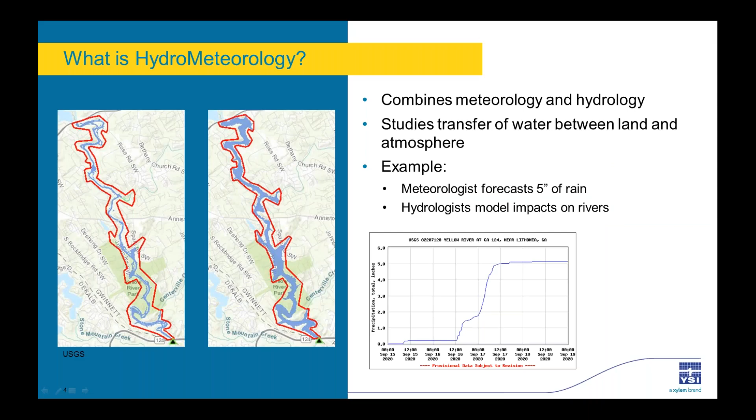All right, so we will pop into our first sensor then. Like Michael talked about with the agenda, we're going to talk about 4 sensors today. So the first one that we're going to talk about is the submersible pressure transducer.

So one extremely nice advantage to this pressure transducer over other models of submersible transducers is the ability to provide that on-site barometric compensation. What this means for you is that the data is highly accurate upon collection and no additional corrections need to be applied for that compensation. So it also has a stainless steel design, which is going to resist corrosion.

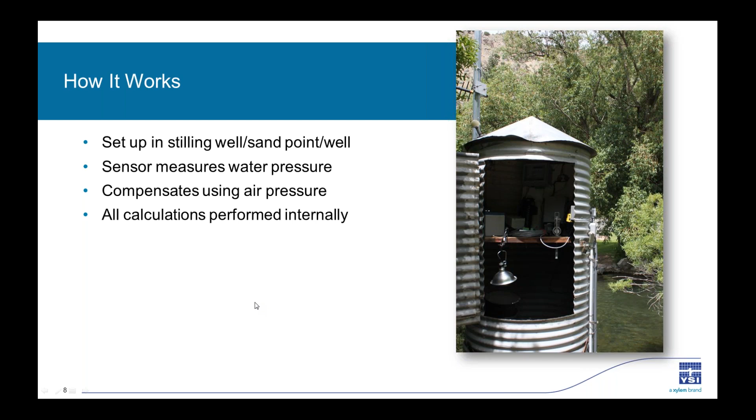So now in this image here, we can actually see a stilling well deployment in Europe. So this station is able to accurately measure the level of water moving through the area from storm flow and also due to pumping into surrounding fields. So that's just a brief overview of our submersible pressure transducers.

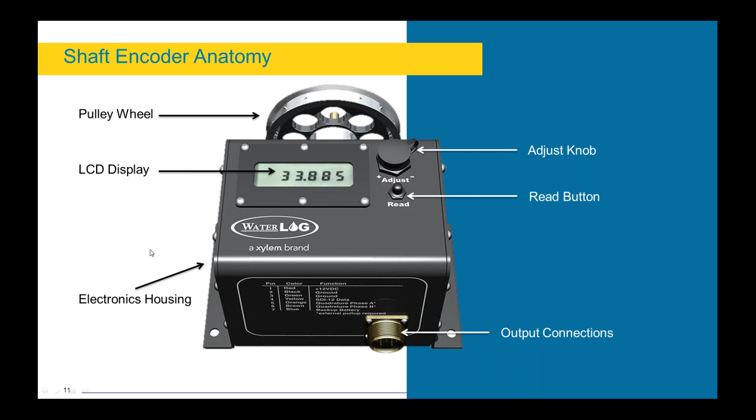So one huge advantage of the shaft encoder is that this one in particular is an optical encoder, which means that the encoder measures absolute position rather than change in position. So we're going to cover this a little bit more in the next slide when we talk about how the sensor works. Also, because of this technology, if power is lost to the sensor, the position itself is not lost. So no visits to the gauge are necessarily needed for a small power blip in order to reset the sensor, which is really cool.

So there's also several requests that come in every year about using other pulleys or tapes with the sensor, and that is also definitely possible. So I wanted to throw that out now.

And finally, similarly to the submersible pressure transducer, the ideal deployment for this sensor is in that same type of stilling well. It is not ideal for turbulent environments, and changes in water level that are too fast for any model of the sensor can actually cause that tape to slip off of the pulley. So just be really careful and aware of your deployment conditions.

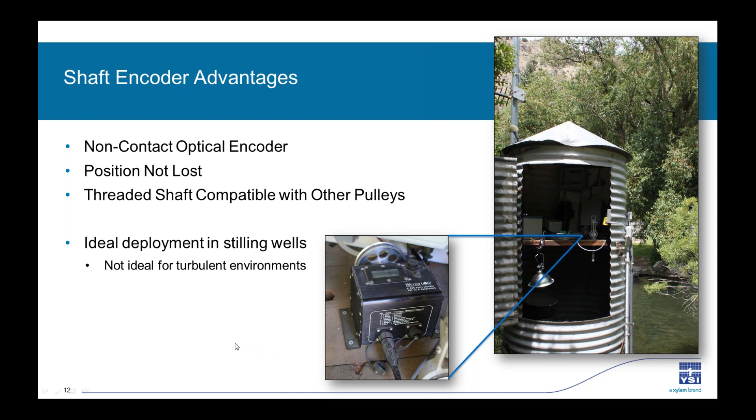So how this sensor works. So after you have the sensor set up in the stilling well, what's actually happening? So as the float rises, as you can kind of see in the picture here, the pulley is going to turn. So there are two non-contact encoders that determine the shaft angle, and there's a magnetic turns counter that counts the number of revolutions that the pulley makes.

Internally, there's actually an LED that flashes through a circular barcode onto a sensor array, and then the image is decoded into a unique position. So the turn counter monitors complete revolutions of that shaft. So by combining the measurements from that turn counter and from the optical encoders, from all of these sensors, really, an accurate absolute measurement can be calculated.

So here's an example of how the shaft encoder can be used. This is in Del Rio, Texas, where water rights are a really big issue. Water rights are permissions for landowners that give them the ability to pull water from a stream or a river. And these landowners are really limited on the amount that they can pull annually. For example, if a farmer uses too much water when compared to his allotted amount, he's going to receive a fine and have to pay some money for using too much water.

So therefore, it's extremely important that a precise measurement is used, and measuring the flow at a certain gate opening amount just doesn't always cut it. Water level at these sites out in Texas is correlated to a discharge rating, and those discharge measurements are made frequently, as can be seen in the image here on the bottom left.

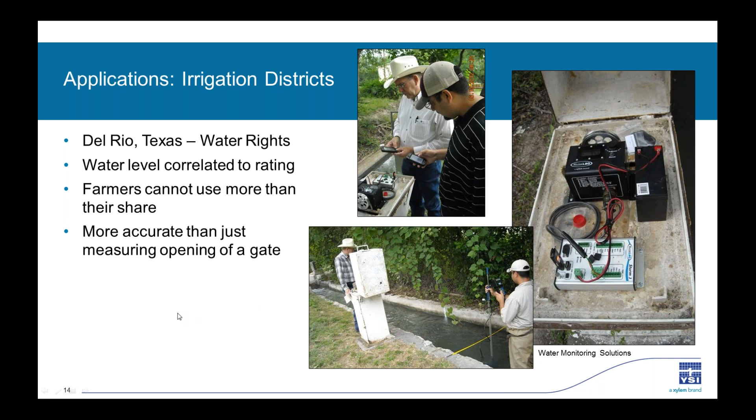Our next application is from Alameda County, California. They used to use these really old, large shaft encoders and these kind of ancient data loggers as well. The maintenance on this equipment was pretty extensive, and when monitoring for purposes like water rights, habitat sustainability and flood management, it's really important to have easy to use equipment that provides good data quickly. When it comes to flood monitoring, as sites lose communication, we can literally have lives in danger. Lots of lives are lost every year to floods and water.

So this group actually replaced their old equipment with new equipment that's easier to maintain, and they're pretty happy to say that they now have better data than before, which has been proven to be useful in all of their applications listed here.

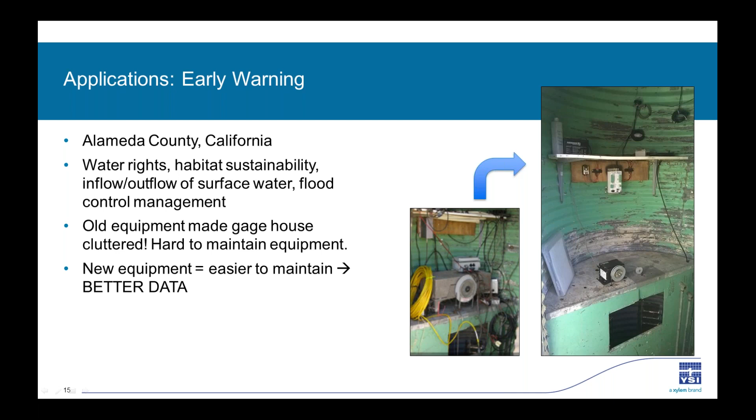The next sensor that we're going to go over is the Amazon bubbler. With this sensor, we're now back to talking about pressure transducers, but I want to point out that this one is actually a non-submersible pressure transducer. So let's dive in a little bit and see what the differences are between this sensor and the sensor from the first section.

The Amazon, like I said, is a non-submersible pressure transducer, and we say that because the portions of the instrument that perform the actual computations remain outside of the water the entire time in this fancy little box that is the Amazon. We'll talk about how the bubbler is set up in a bit, but it was designed to be extremely user-friendly and has an easy-to-read screen, quick touch buttons and streamlined navigation, all the fancy bells and whistles that we all like to see and use every day.

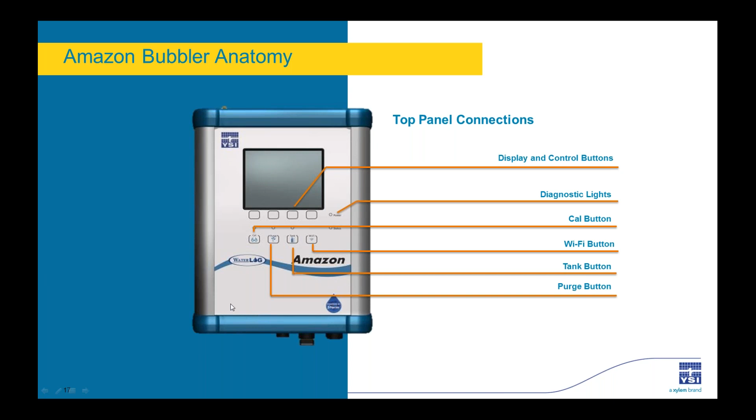On the bottom of the Amazon is where all the connections are. There's a couple of USB ports for transfer of data and also for a Wi-Fi adapter connection. There's also a place for the transfer of air into and out of the system on the left-hand side. And of course, we offer a few connection options such as RS-485, 4 to 20 milliamp signals, and SDI-12, so you can communicate to a data logger over a variety of signals.

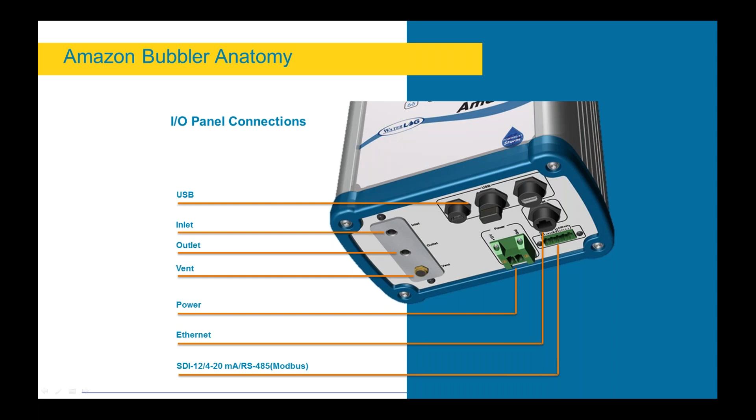The key advantage to using the Amazon bubbler over sensors of the same type is the ability to connect with many different systems, because it communicates in so many different ways, as I just mentioned, with the 4 to 20, the RS-485, and SDI-12. The Amazon also has a special ability to store data internally, so it can even be deployed without being connected to a data logger, which makes it a standalone system, which is really nice for those deployments where you just need to get something out there real quick to look at the data later.

So similarly to our other instruments, it's extremely accurate, and unlike some other bubblers, it doesn't require an external pressure sensor because it has one built in. So finally, it has two easy ways that it can be programmed. One is via the browser interface, or the other is the optional low power display that you can kind of see in the picture here.

So the sensor is really great to use in streams and rivers and lakes, and an orifice line can be mounted along a stream bank or down a culvert wall as a couple of different examples. So the averaging time of this sensor can also be adjusted, which is going to account for any effects of waves or turbulence to provide you with the most accurate water level reading possible. So the difference between this one and the submersible pressure transducer is also that we don't have to have still water for the Amazon bubbler.

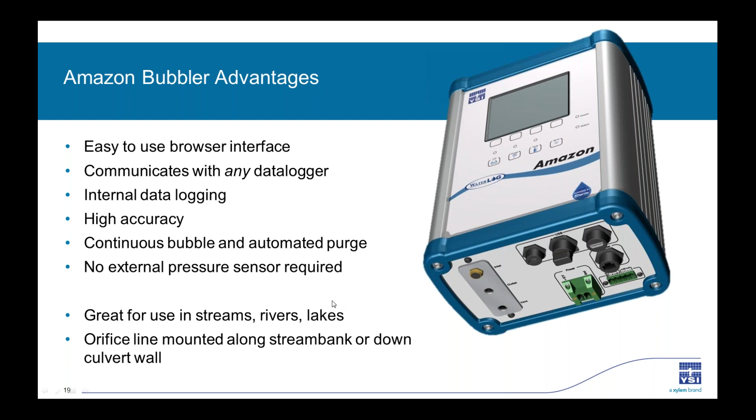So now a little bit about how a bubbler actually works. So this black and white image here on the top left actually shows an older model of the bubbler that our company used to carry, which is called the H3551. But the image is still really going to help describe the internal components and how the sensor works. So inside the bubbler is a compressor, and there's also an air holding tank. So the two of these working in conjunction are going to provide a continuous flow of gas bubbles through the orifice line that runs from the Amazon down to the water, as shown in the image on the right.

So the amount of pressure that it takes to create this continuous flow of bubbles actually determines the depth of the water. So as you can see here on the slide, the equation used to compute this in essence is height equals pressure divided by specific gravity of the solution. Now, the Amazon also has an integrated pressure sensor to account for changes in external air pressure as well to always provide the highest accuracy data. So that's going to be accounted for in that equation too. So it's not quite as simple.

So finally, the orifice line and the tanks need to remain really dry in order to work properly. So connected to that air inlet needs to be a desiccant canister as seen in the bottom image here. So the desiccant dries out the air that comes into the instrument and does need to be changed periodically, and typically you can tell when it needs to be changed by a color change in the desiccant itself.

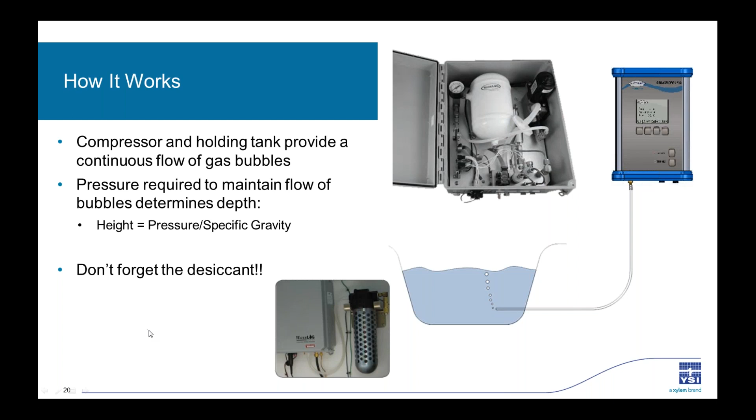So now we have a couple applications regarding the Amazon, and the first one, we're back in California again. So now we are in Contra Costa County, California, which is near San Francisco. So the county employs several of our Amazon bubblers as a part of their flood monitoring network. They actually have a really large rainfall network that's used to monitor where rain has fallen, and the water level sensors are going to allow employees to monitor the flow and determine when and where the public might actually be in danger.

So the creeks that they measure are typically fairly dry, so it's really important that they have a water level sensor that can handle rapid changes in water level, which the Amazon can do really well. So the team also highlighted that the Amazon is really easy to configure, and even though they do have that optional keypad, they actually prefer to use the easy to use GUI, the graphic user interface.

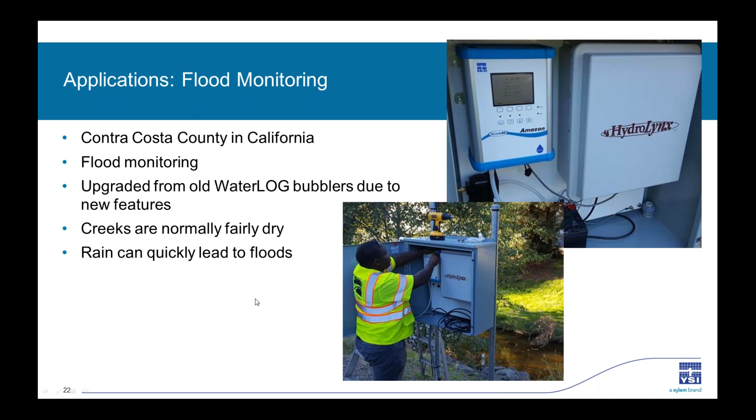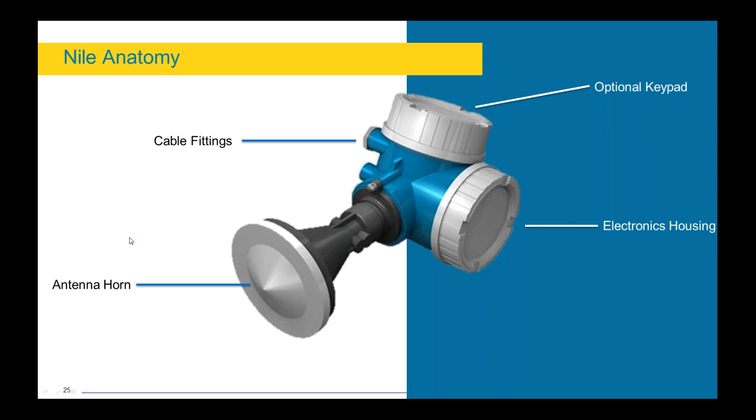Now, what you're going to need to do with the Nile is actually have an overhead structure similar to a bridge, or maybe you're able to build some kind of infrastructure piece to mount the Nile radar. But what you want is a piece of infrastructure that's not going to move around too much because, of course, any movement is going to affect your sensor readings. So, for example, if you have a really windy area, you don't want to just have it sitting on a fence post sticking over the creek. You want to have something really solid.

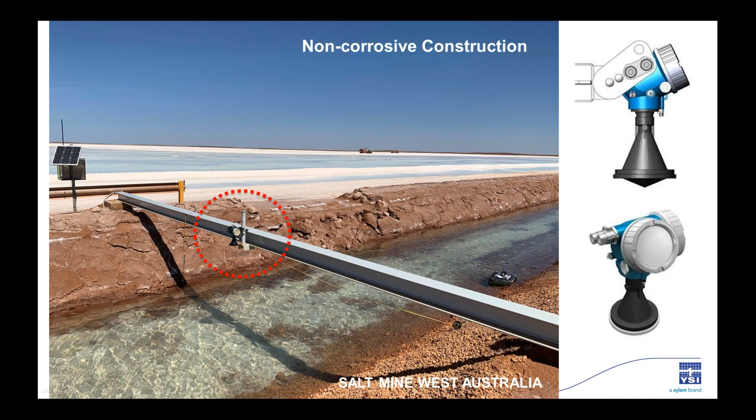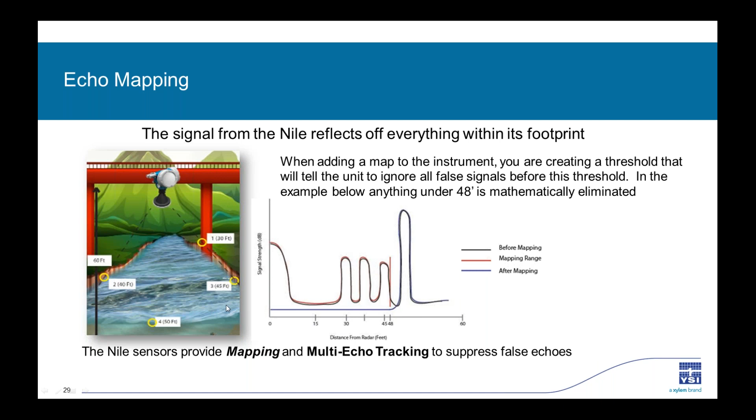So there's definitely a lot of uses for all of these instruments, but I have a lot of application examples for the Nile radar here. So the first that I'm going to talk about is just that simple water level measurement. So here in the US in Chicago, they wanted to augment their water quality monitoring station with the addition of a water level sensor. So water quality changes can actually be better explained if there is accompanying water level data.

So they installed a radar because it was non-contact, it was really easy to set up, and it required minimal maintenance. So now they have real-time dissolved oxygen and water level information to better determine what's going on at the site.

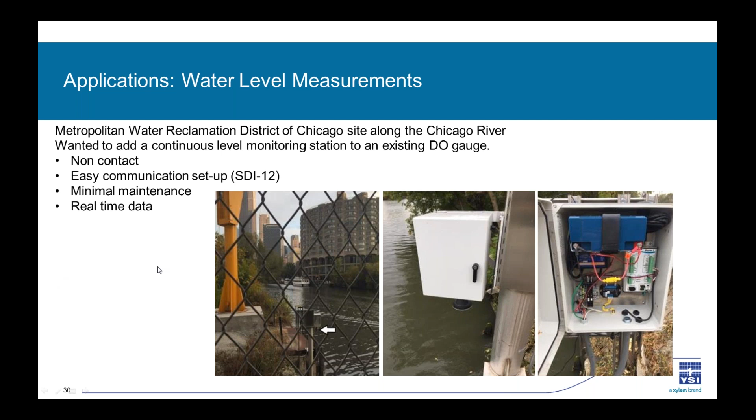So air gap measurements are very important for those in the marine transportation industry. So it's vital that ships know if they have the clearance to safely pass underneath a bridge. And one of the measurements that can be transmitted by the radar is that distance to water. So the Nile will actually give you two different measurements. One is air gap and one is water level, which can be related to depth, of course, through surveys.

And by combining these two, safe passage can basically be guaranteed for these ships. If they don't have the depth, and if they don't have the air gap, they can't travel through this area and they have to wait.

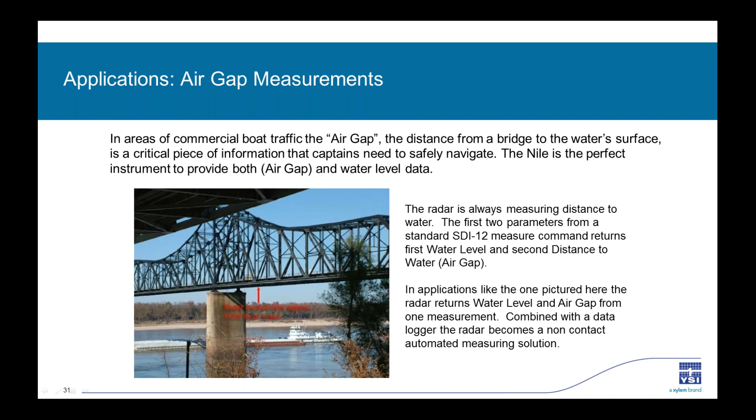So the Nile is also really important for monitoring tides to verify how high and how low the different tides are, which again can be really helpful for marine safety. So the tidal data can also be used to determine trends to see if water levels are changing over the years and what the effects of tidal change are on the ecosystem. So in this case, the Nile is using one of the NOAA modes, which collects a large amount of data and performs internal statistical analyses, which then lead to an accurate average data point.

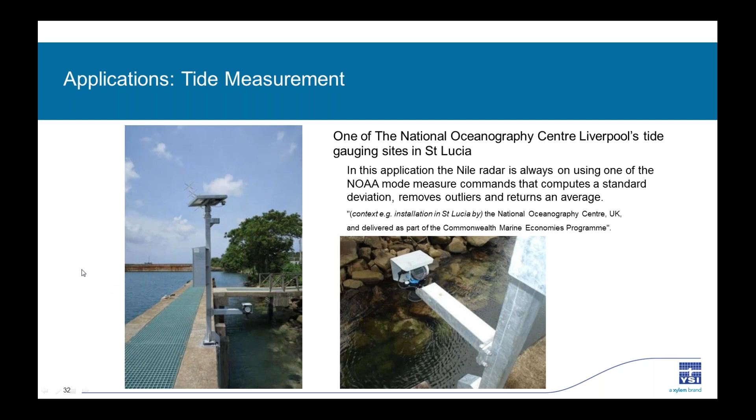The data is eventually sifted through and the mean and standard deviations for the 181 seconds are calculated. The radar can then output the mean water level, the number of outliers, the number of good values used in the calculation, and also that standard deviation.

So I do have a little video here that I'm just going to try and take 2 seconds to play that just kind of shows you how easy it is to remove the Nile for maintenance, and it's just as easy to put back in. So let's see if it'll play. See, they just quickly took it out. Now they can do the maintenance really quick and life is good and they can put it back. So with some SDI-12 commands after they reinstalled that sensor from a data logger, the Nile is going to begin to record accurate data again just really soon after that install.

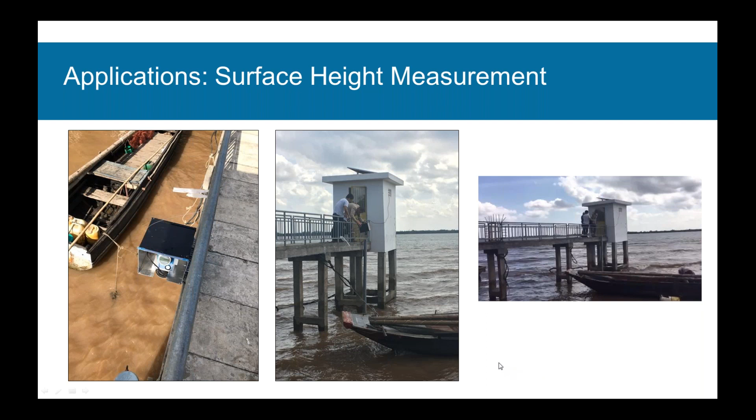So finally, the Nile can be used to monitor storm surge during hurricanes. Since these radars can be mounted above the highest level of storm surge heights on existing infrastructure, there's actually no worry that the units are going to be flooded, and accurate data can be collected before, during, and after hurricane events. So through the collection of this data, emergency management can plan best where they will need to deploy to save lives and property. And there can, of course, also be a lot of studies done too to see what the effects on the ecosystem are.

And Michael, I think we are ready for another slide. I think they've had enough of me talking for just a minute and would like some engagement. Thanks, Kerry. Certainly educational and very informative.

Thank you. Our second poll question is, please indicate which water level sensing technology you predominantly use. Submersible, shaft encoder, bubbler system, radar water level sensor, or other. Again, for those of you who have come on late and are not sure how to use the poll question, simply move your mouse over one of the answers and simply click with your mouse on the answer you'd like to respond with. So just give our audience a few seconds to respond.

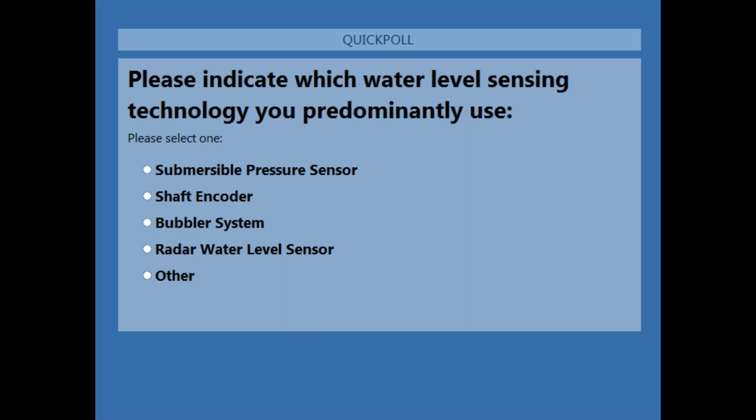All right, Kerry, it looks like we've got most of our responses. Let me just share those with the audience and yourself. It looks like 50% of the audience have answered submersible pressure sensor. Interesting. That's really some good information. What is our next most popular there, Michael? Yeah, it's actually 24% with other. Oh, interesting. I'd be curious to hear what those other types of sensors are. So maybe you guys can pop that information into the questions panel that Michael was just talking about. That'd be fantastic to learn about. This is followed by radar water level sensor at 18%, and then 5 and 3% for bubbler and shaft encoder. So it looks like submersible pressure sensor is the level sensor that's predominantly used by our audience.

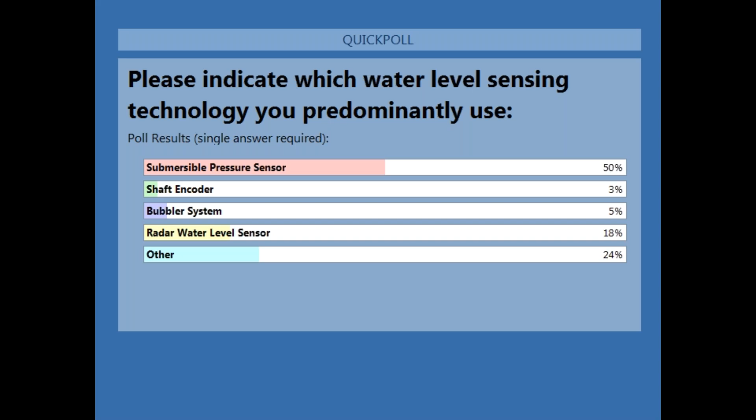Excellent. Well, thank you very much for sharing that. And we will pop back into the presentation here.

And now section 5, we are done with our precision sensors. So now I'm going to talk a little bit about our Storm 3 data logger as a telemetry solution for you guys. So the Storm 3 is a mid-range data logger that supports cellular or satellite telemetry options. So this logger is unique in that it comes preloaded with a built-in sensor library for easy sensor setup in the browser-based graphical user interface. So just like the Amazon, you can connect to the Storm 3 using Wi-Fi or a device cable.

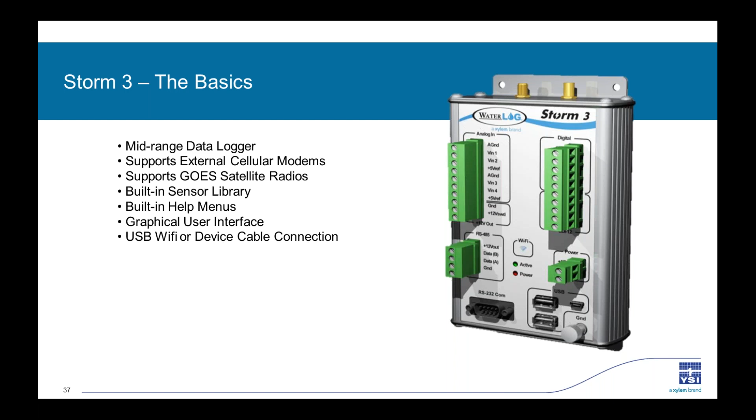So as you can see here, the Storm 3 allows for the connection of analog, digital, and SDI12 devices. There's also ports for RS-232 and RS-485 sensors to be connected. So when that little Wi-Fi button right there in the middle is pressed, if you do have a Wi-Fi adapter attached, a user can connect to the Storm 3 using a laptop, a tablet, or a mobile device for easy programming in the internet browser of their choice. And there's also USB options for connecting through a device cable and also for transferring data to and from the logger.

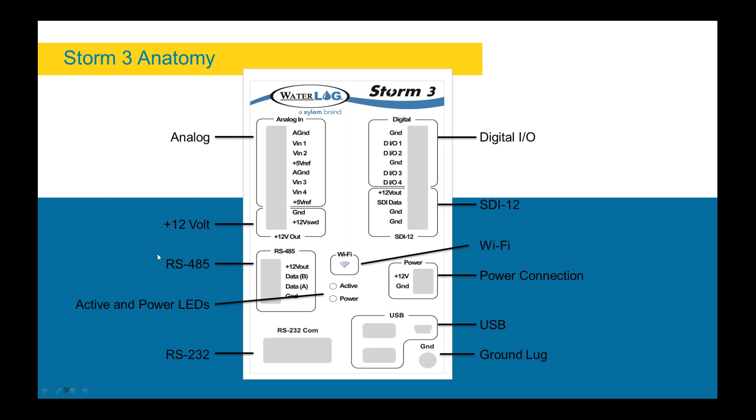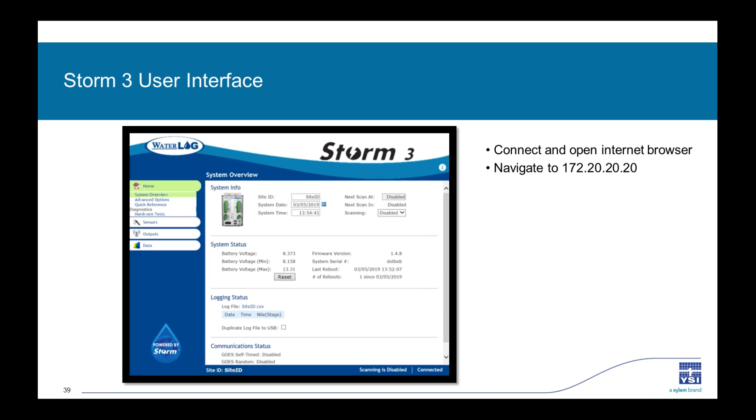So this is what the main menu of the Storm 3 interface looks like. The Amazon interface was actually based on this design, so you might see they look pretty similar. Therefore, if you know how to maneuver through the menus in one instrument, you should be able to in the other, which is pretty nice. So when you connect to the instrument through cable or Wi-Fi, you navigate to the IP address listed there on the right-hand side of your screen if you're not directed there automatically. And that's how you get to this screen.

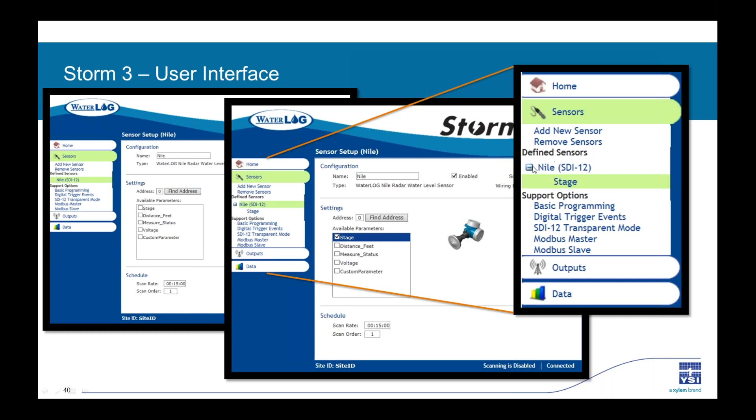So in these few images here, you can actually see how simple it is to add a new sensor. The user clicked on the Sensors tab on the left-hand menu here, found their sensor from the drop-down list and added it. And now it shows up in the sensor menu on the left. So we see we added a Nile radar. Next, the user would select that sensor and check the boxes indicating which parameter they would like to have logged, either internally, telemetered, or both. In this case, we chose stage. Once the parameter is selected, it also appears in the list, and that's what we have zoomed in on here.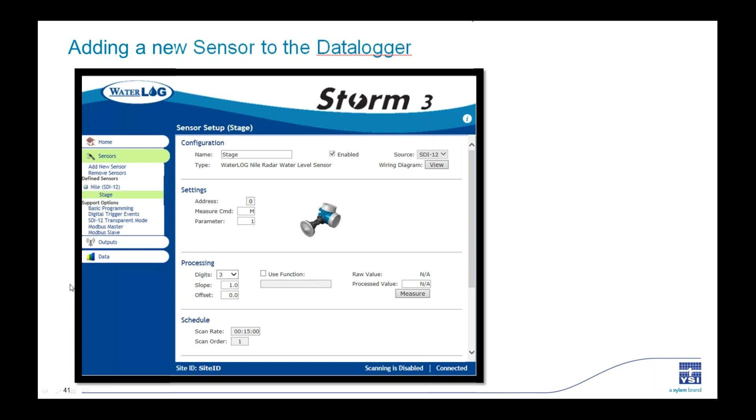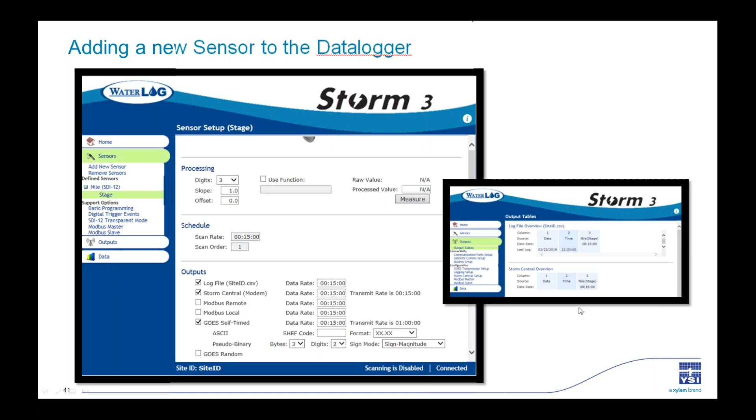So the San Francisco Public Utilities Commission has been using our YSI equipment for a long time, and they chose the Storm 3 because of its ease of use and its ability to transmit to the cloud-based data hosting platform that we're going to talk about here in a minute. They're monitoring the Crystal Springs Reservoir, which serves as a drinking water source for over 1 million residents. It's also a huge fish and game refuge for wildlife, and the state mandates that environmental conditions have to be just right for the wildlife in that reservoir to survive.

To maintain the water quality that's needed, the Storm 3 transmits pH data collected by an EXO2 sonde so that adjustments can be made to the treatment processes at the water treatment facility to ensure that the pH remains between 6.5 and 8.5 in this reservoir. So it's really important that they had that as a real-time data source so that they can make those adjustments quickly.

And Michael, I think now we are ready for another poll. Thanks, Kerry. Our poll number 3 is, please indicate what generation cellular network is currently preferred for your cellular data transmission. We have the options of 3G, 4G, or 5G. So once again, please roll your mouse over and simply click on the response you'd like to make.

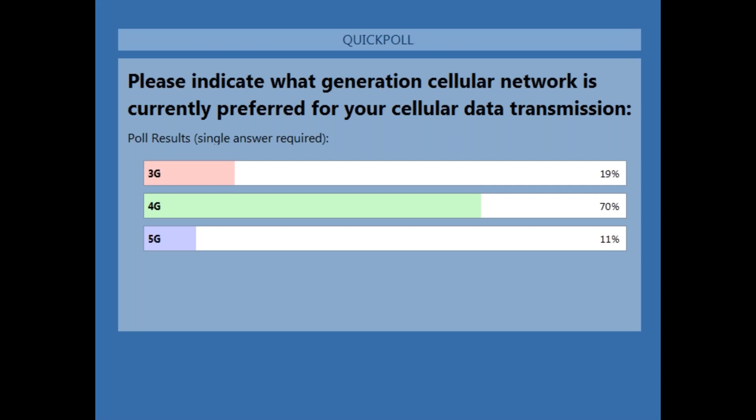And we have 70% of the audience selecting 4G. Excellent. Followed by 19% for 3G and 11% for 5G. Okay, excellent. So yeah, we definitely have a lot of 4G users, so we need to make sure that we're able to transmit for 4G for sure. And we do have that ability, so that's good.

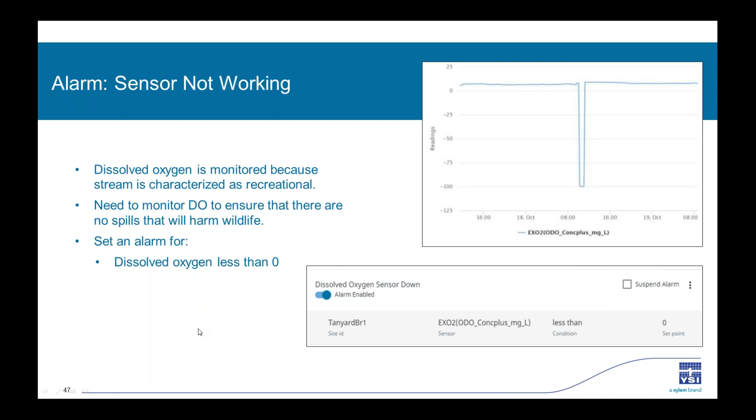Finally, with my HydroMet sites, I need to go out there if my site stops transmitting altogether. Transmissions can fail for a variety of reasons, such as a hiccup in the cellular signal, GOES transmissions being stepped on by another logger, and many, many more. With the site missing communication alerts, I can know if a single transmission is missed so that I know to start looking for reasons why.

Was there a bad storm that knocked out power to the cell tower? That happens a lot during hurricanes out here. Did my battery die earlier than I expected? Could lightning have hit my station, maybe fried my data logger? Things happen, but the most important thing is that I get the site back up and running.